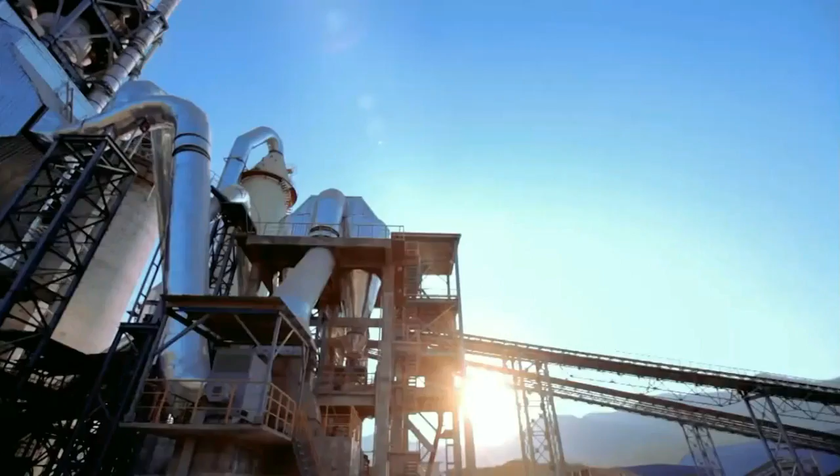The cement industry is perhaps one of the largest and most significant industries today. The industry is capital intensive, with the establishment of a plant requiring a long turnover time. It is also energy intensive, requiring large amounts of fuel for its production process. The process involves the excavation of natural minerals found in the ground.

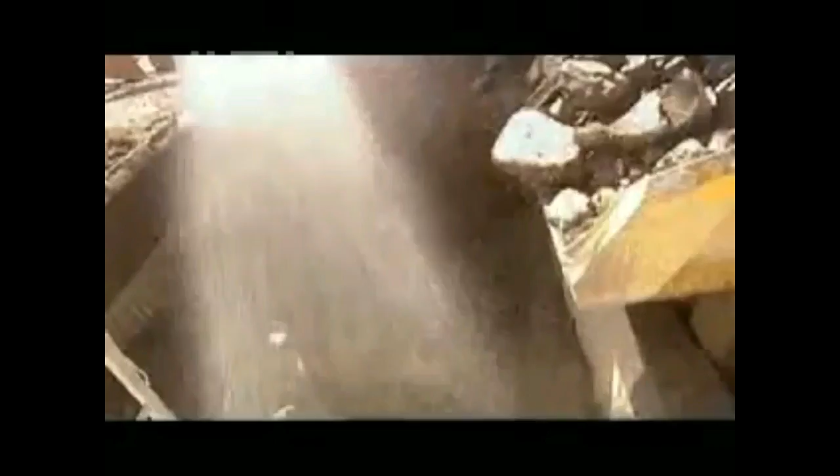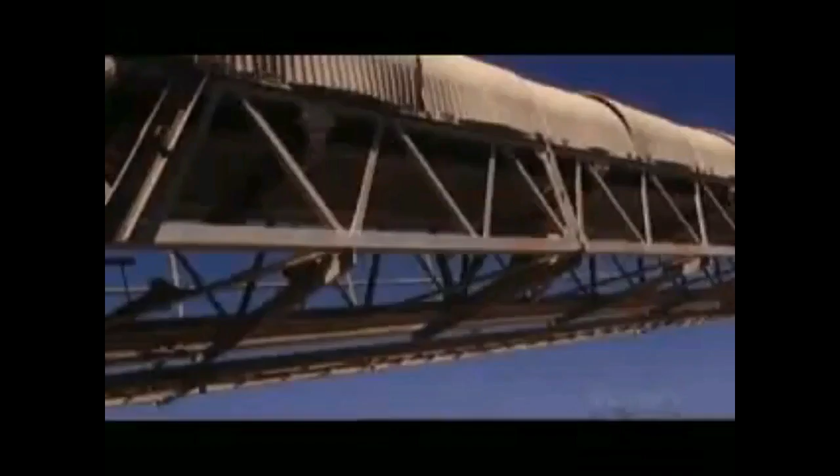Countries are trying to achieve economic growth and sustainability, and with these come a high necessity for infrastructure and highways. Large business companies heavily rely on cement for the establishment of their facilities like malls, stores, and manufacturing plants. As a result, the cement industry experiences a very high demand on its products, being a key to the development of the nation.

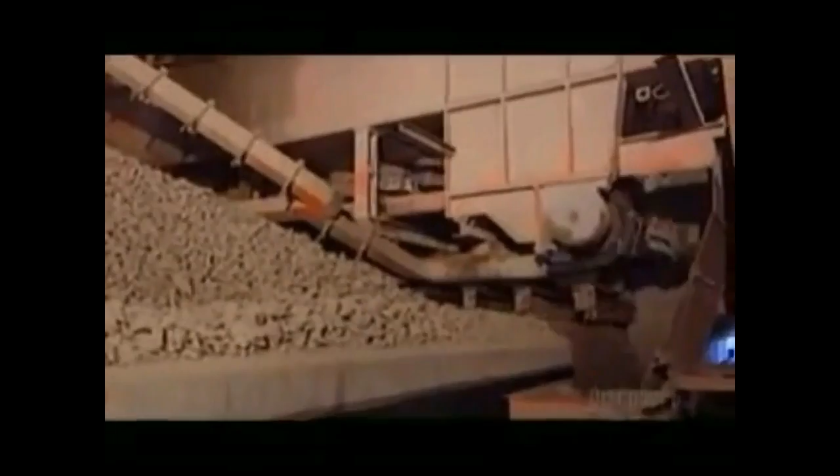The Philippines is considered a developing country, and its economy is considered one of the largest among the Association of Southeast Asian Nations members. The rise of its economy entails the heavy necessity for buildings, infrastructures, and roadwork, since the economy is majorly reliant on tourism and agricultural products in need of transport.

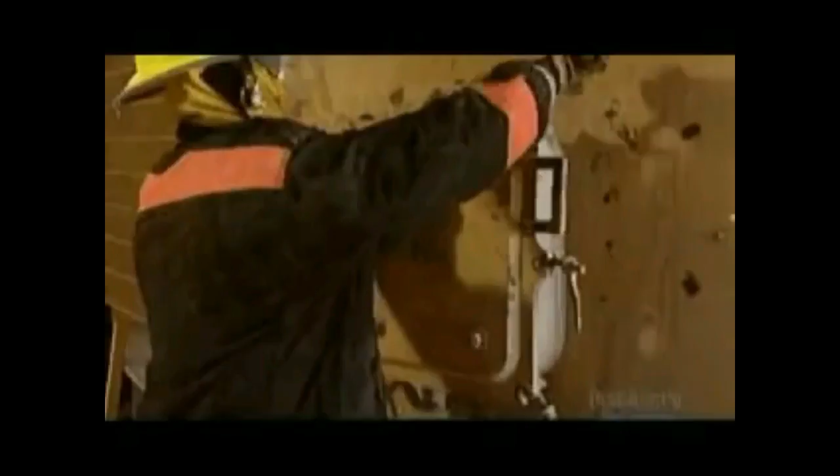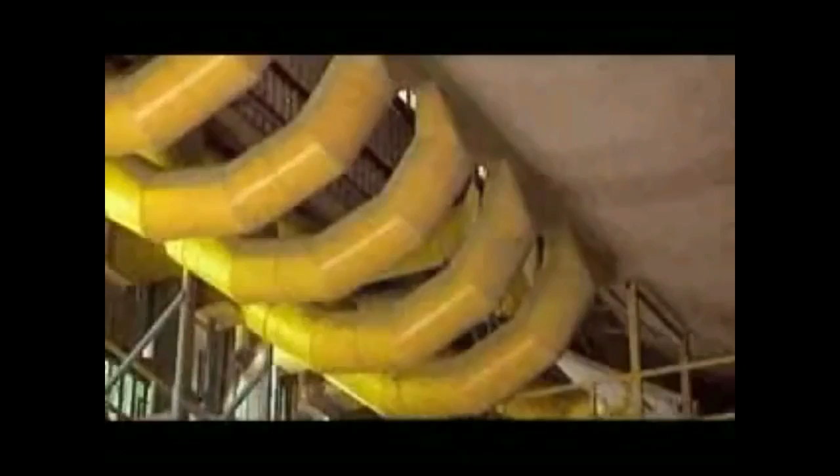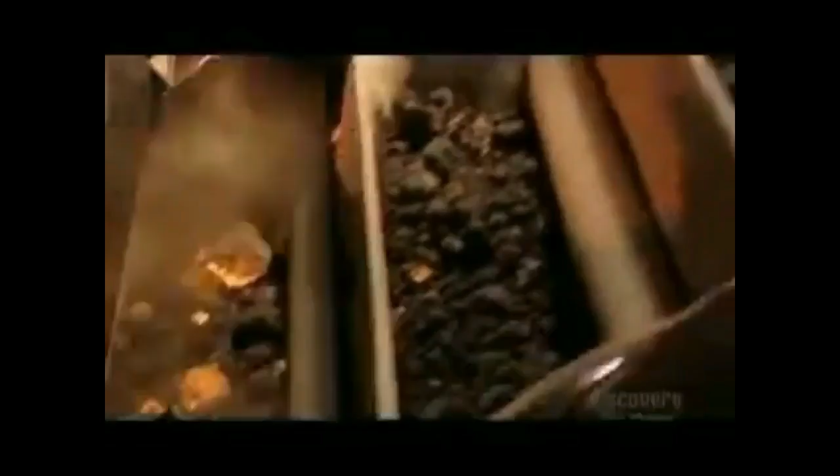Currently, the Cement Manufacturers Association of the Philippines has 6 members. These members have a total of 16 cement plants scattered across Luzon, Visayas, and Mindanao. The Philippines, having a land mass with an abundance of minerals, is ideal to the cement industry. The impending rise of the economy of the Philippines and its transition from an agricultural-based economy to an economy based on manufacturing will pave the way to the success of the cement industry in the years to come.

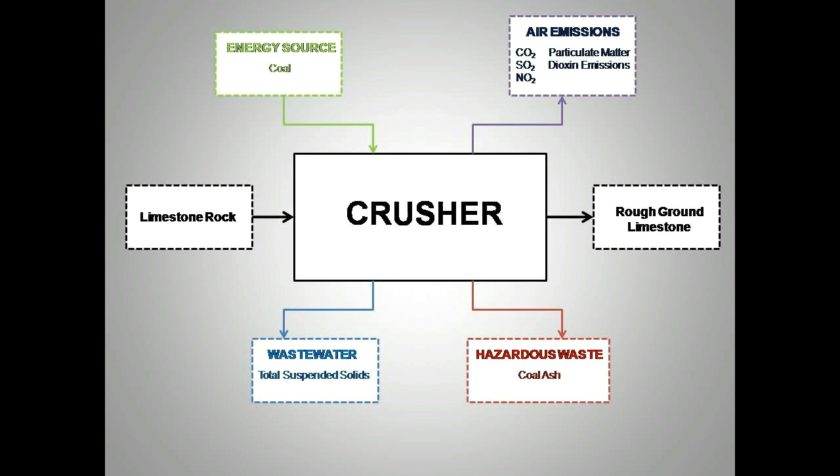In the production of cement, a crusher is first used. A crusher is a machine designed to reduce boulders into smaller rocks, gravel, or rock dust. Crushers may be used to reduce the size or change the form.

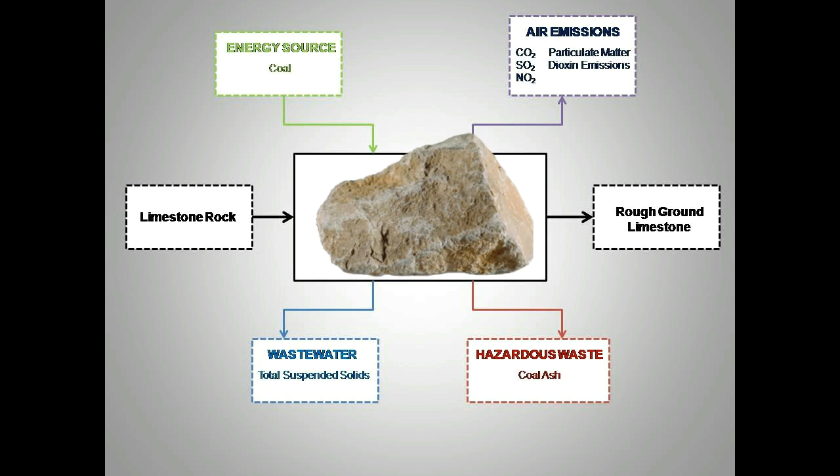For cement production, the limestone rocks that came from the limestone quarry will undergo the crusher machine so that the rocks will be crushed and reduced into smaller ones. The resulting rocks from the primary crusher are still rough ground limestone.

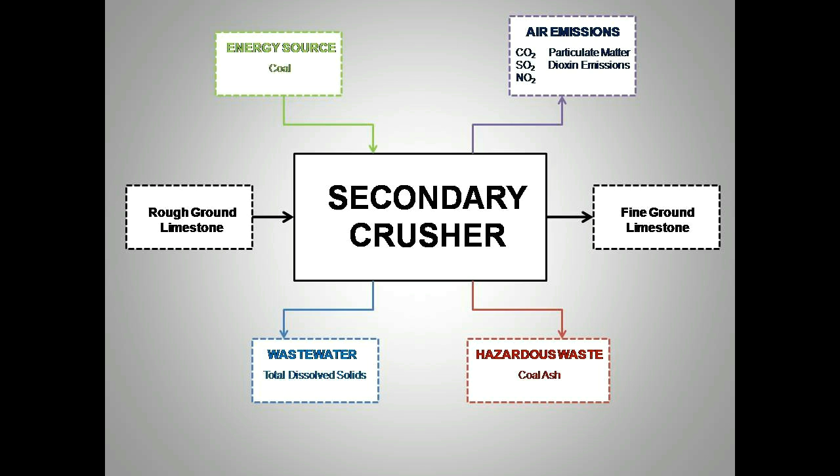To ensure the production of a fine ground limestone, the resulting ground stones from the primary crusher are then passed through a secondary crusher. The third process will be under the proportioning equipment.

In the proportioning process, other raw materials will be added to the materials being used so that the exiting product will contain the desired amount of each material, given the property that they can contribute to the overall product. In the cement production, the fine ground limestone that entered the proportioning equipment is mixed with fly ash, iron silica, slag, and calcium compounds that were delivered by truck. The resulting exiting product is a mixture of sand, limestone, and clay.

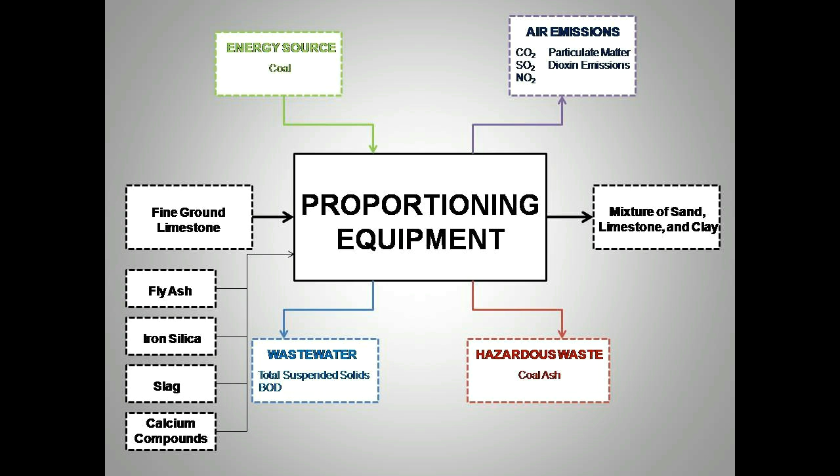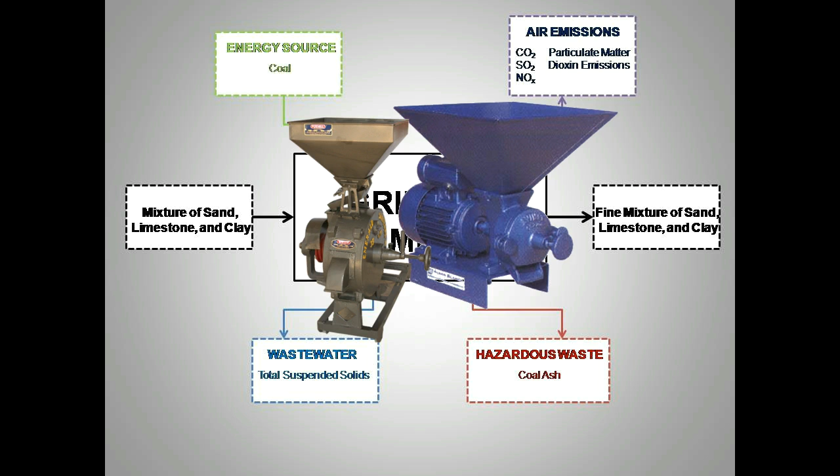The mixture of sand, limestone, and clay that exited from the proportioning equipment will now enter a grinding mill. A grinding mill is a machine that breaks solid materials into smaller pieces by grinding, crushing, or cutting. It is used because the materials added to the fine ground limestone may still be in chunks, which are not desirable. Given the physical nature of the desired cement, the sand, limestone, and clay mixture will go through a grinding mill so that they will obtain a fine powdery-like texture.

After going through the grinding mill, the raw meal will then undergo the preheating tower and the kiln. A kiln is a thermally insulated chamber, a type of oven, which produces temperatures sufficient to complete the cement making. In the production, the blend raw material enters the kiln via the preheating tower.

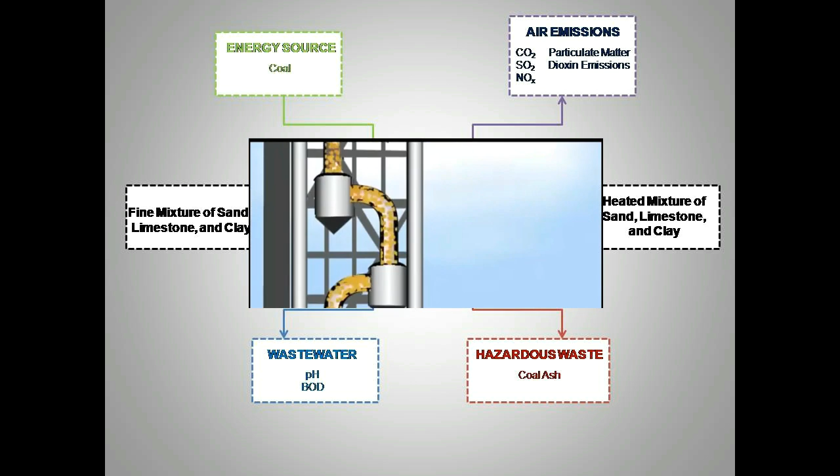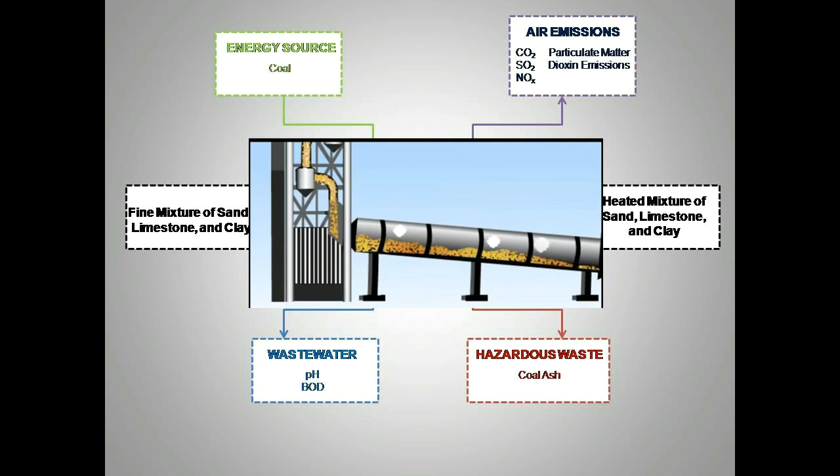In the preheating tower, hot gases are used to heat the raw meal. As a result, the raw meal is already hot before it enters the kiln. The preheating tower provides a series of cyclones in which fast-moving hot gases keep the meal powder suspended in air. All the time, the meal gets hotter and the gas gets cooler until the meal is at almost the same temperature as the gas.

In general, the hot gas from the kiln are blown through the cyclones. Heat is transferred efficiently from the hot gases to the raw material, and this minimizes the waste of fuel when the meal already undergoes the kiln itself.

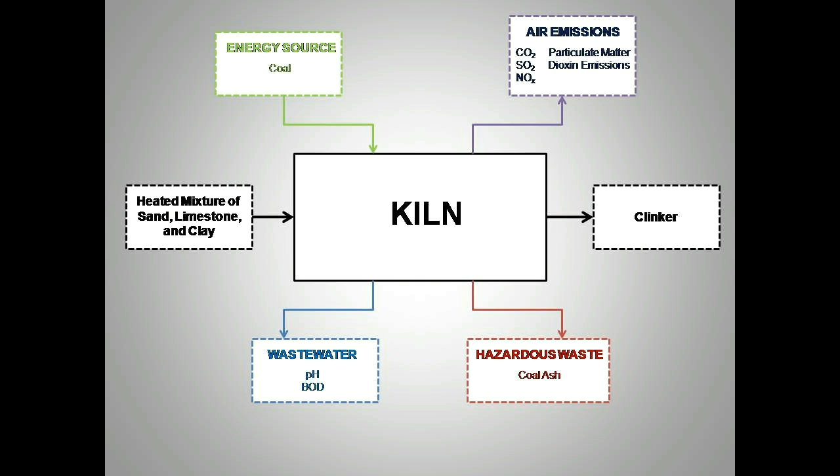The exiting meal from the kiln is now called a clinker, which is the basic material needed to make cement. The clinker will then pass through the clinker cooler to have the clinker cooled. Along the process of cooling, the heat energy from the clinker can be recycled and used again for the heating process. Therefore, this would avoid wasting the heat energy contained.

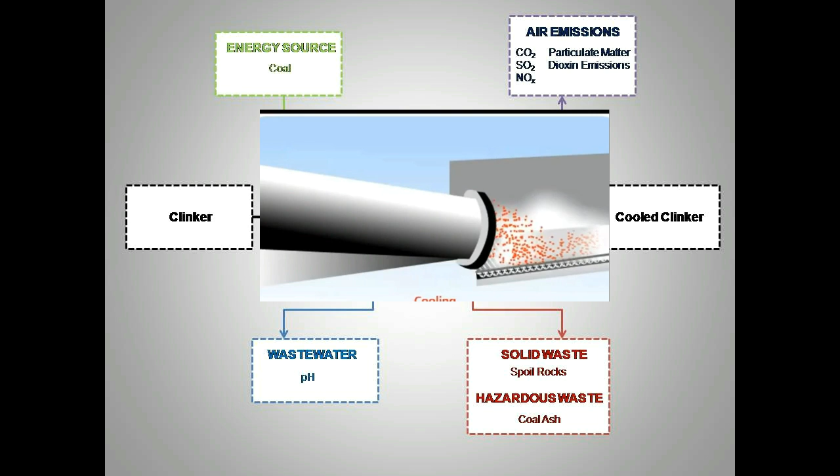This will now make the clinker cool enough to handle and ready for the upcoming grinding, given that the suitable temperature for grinding should only be less than 100 degrees Celsius.

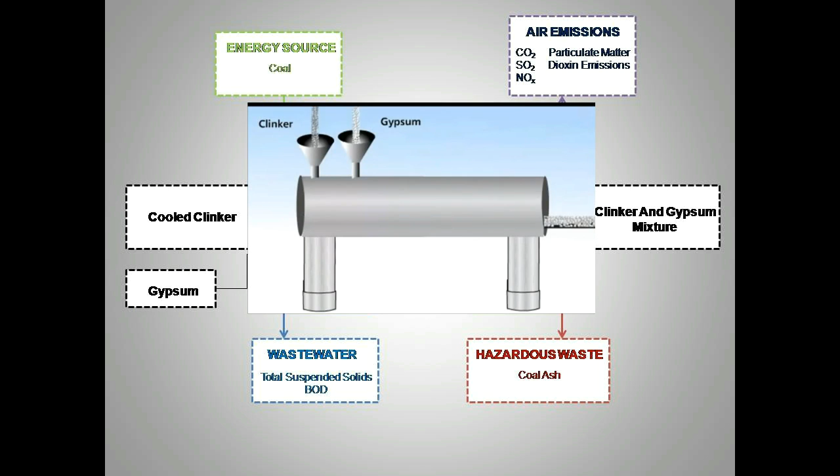The cooled clinker will now enter another proportioning equipment. A new material, which is gypsum, will be introduced. Gypsum plays a very important role in controlling the rate of hardening of the cement. It controls the setting of cement. If not added, the cement will set immediately upon mixing it with water, leaving no time for concrete placing.

The new mixture will undergo another grinding mill. Given that gypsum is added, some parts of it may still be of bigger pieces. They will undergo a grinding mill to break the chunk of materials into smaller and finer pieces.

After being heated, cooled, proportioned, and ground again, the exiting product from the grinding mill will now be the cement, which is now ready for storage and packaging. The cement will be stored in a place where they will be staying until they are ready for packaging.

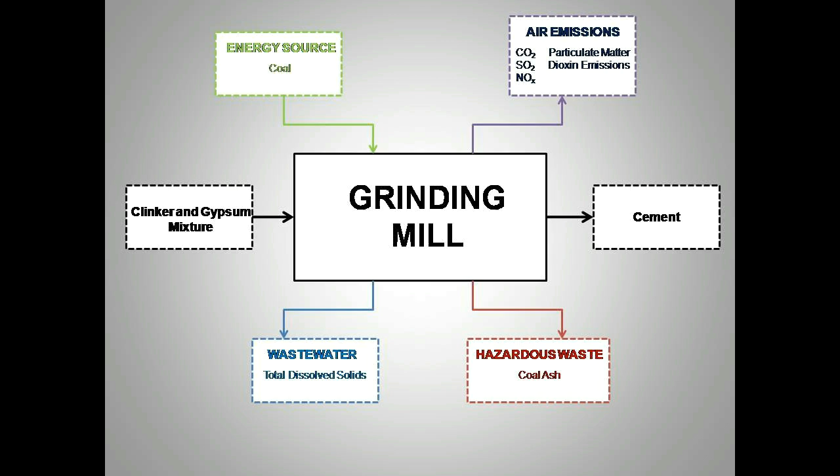Packaging only involves two processes. The first one is the filling process. Here, cement bags made of paper will simply be filled with the cement product. After the filling stage, the still open bags of cement will undergo an airtight sealing process. Here, the bags will be sealed airtight so as not to allow any air to escape or pass through, and of course to prevent any spillage of cement.

After packaging, the final cement products is now ready for distribution, selling, delivery, and use.

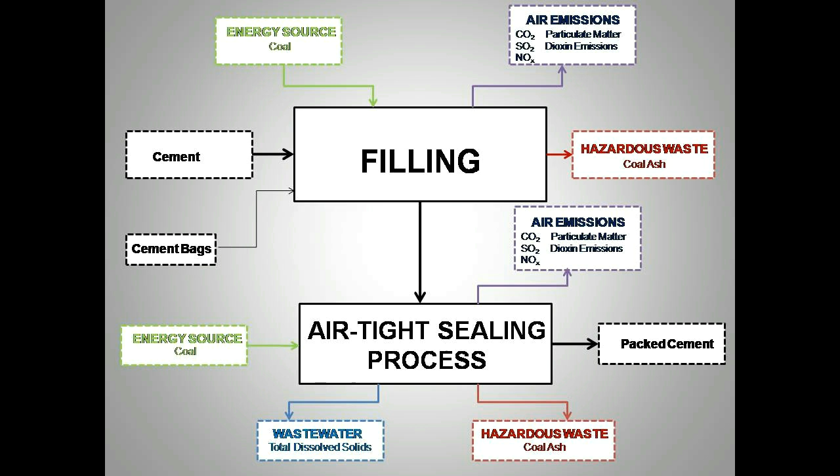Now let's go to the waste characterization. Generally, in the manufacture of cement, the wastewater quality parameters affected are the total dissolved solids, total suspended solids, pH, BOD or biological oxygen demand, and turbidity. These problems arise due to the particles coming from the unit operation which accidentally combine with the water used to cool the equipment.

For the solid waste, there are three main wastes produced, which are coal ash, plastic containers, and sludge. Coal ash is considered as a hazardous waste because it contains toxic heavy metals such as arsenic and selenium. Sludge and plastic containers are considered as a solid waste. The water wastes are treated in the water treatment plant, while the solid and hazardous wastes are sent to the materials recovery facility.

The wastewater treatment plant is where the wastewater from the previous stages of cement production goes in order for it to be treated before discharge. The processes in the production affected the quality of water, which includes the parameters BOD, TSS, TDS, pH, and turbidity.

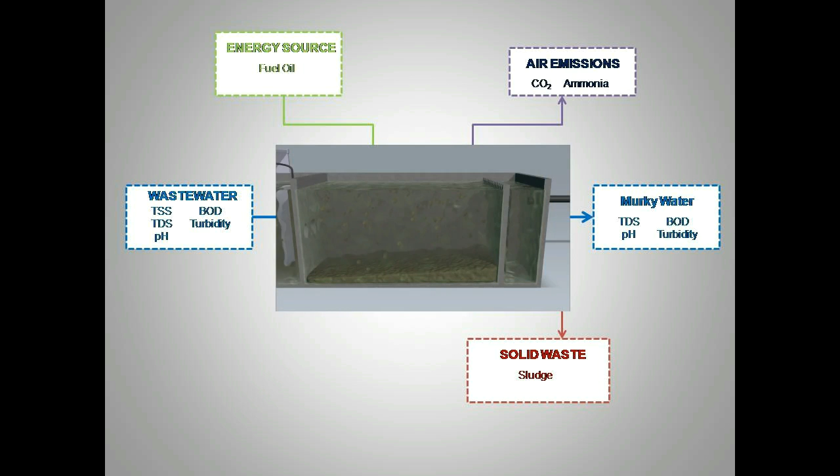For the first part of the treatment plant, the wastewater will undergo sedimentation process. This is a physical water treatment which uses gravity to remove suspended solids from water. The wastewater from the cement production is brought to a settling basin, which is a concrete structure, where the sedimentation process is used to remove the unwanted matter. Here, sludge is removed and collected to be delivered to the MRF.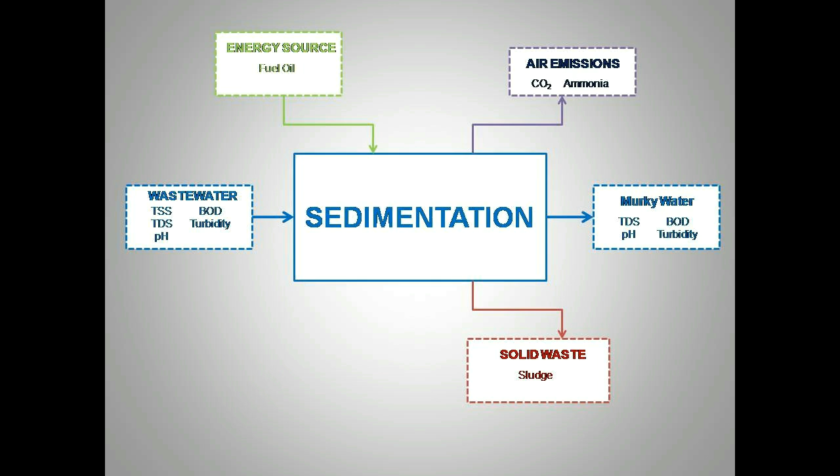The murky water will enter a second water treatment process, which is the multimedia filtration. A multimedia filtration refers to a pressure filter vessel which utilizes 3 or more different media. Here, the largest contaminants brought by the murky water are encouraged to become trapped in the first layer of the filter, with smaller particulates sifting further down into the lower layers.

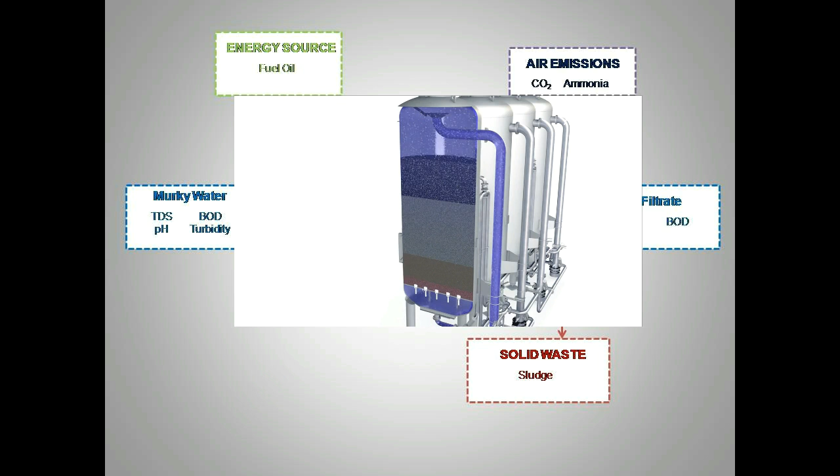Trapping contaminants in this manner allows for more efficient turbidity removal. Sludge is removed in the filtration process along with the wastewater parameters TDS and turbidity.

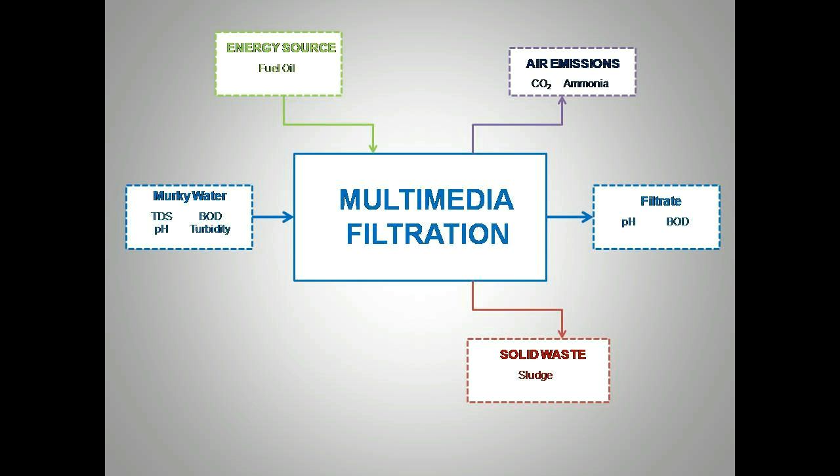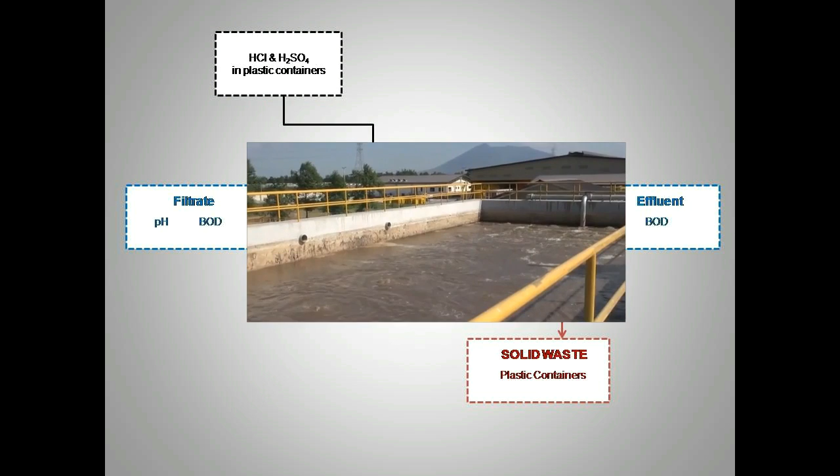The filtrate from the multimedia filtration will enter an equalization tank. The main function of an equalization tank is to act as a buffer. It collects the incoming raw effluent that comes at widely fluctuating rates, stores it, and lets it out during a non-peak time, when there is little or no incoming raw effluent.

When the filtrate from the filtration enters the equalization tank, hydrochloric acid and sulfuric acid are added to neutralize the pH of the water. Therefore, in here, the flow rate of the entering and exiting water is equalized along with the neutralization of the pH. The effluent from the equalization tank now only contains BOD as a wastewater parameter affected.

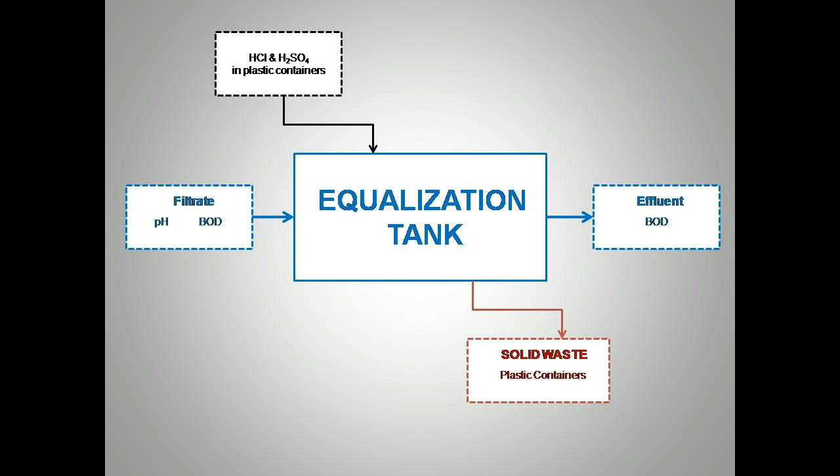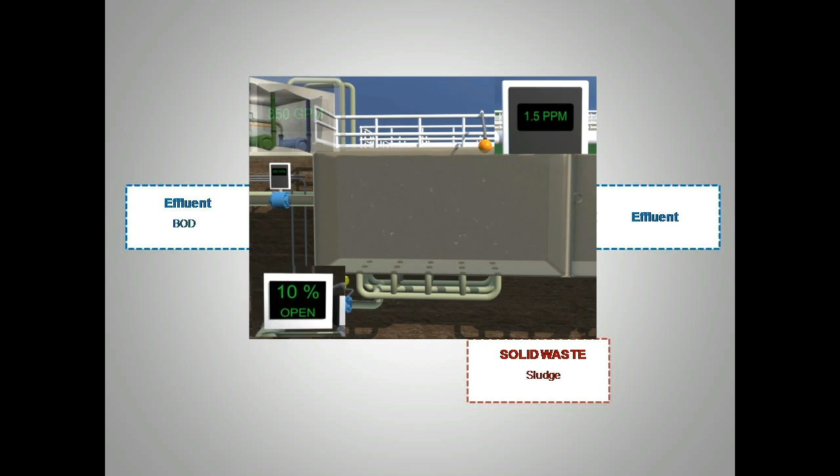It will undergo the aeration process. Aeration is used to mix, circulate, or dissolve air into a liquid, in this case, water. In the treatment, air is added into the effluent, which allows aerobic biodegradation of the pollutant component. It provides oxygen to the bacteria for treating and stabilizing the wastewater effluent.

This is because without the presence of sufficient oxygen, bacteria will not be able to biodegrade the incoming organic matter in a reasonable time.

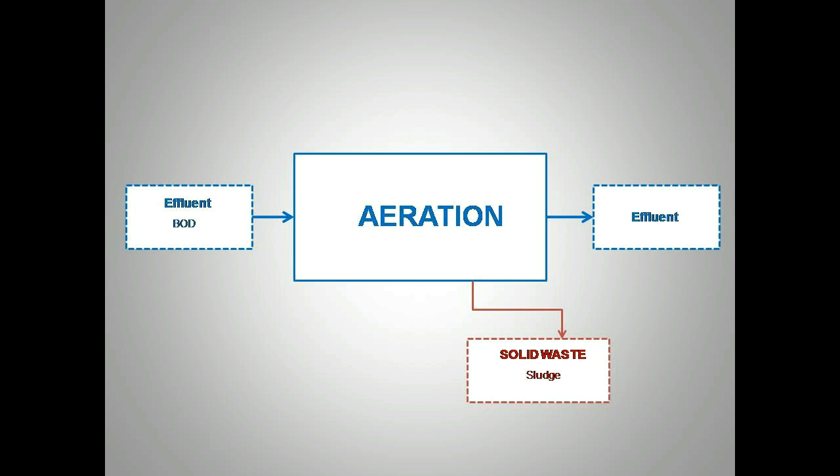After the aeration, the resulting effluent will undergo the disinfection process, which is the final stage in the water treatment. This process provides a degree of protection from contact with pathogenic organisms as it removes, deactivates, and kills those organisms. In this process, a disinfectant is used to aid in the purification of the effluent water.

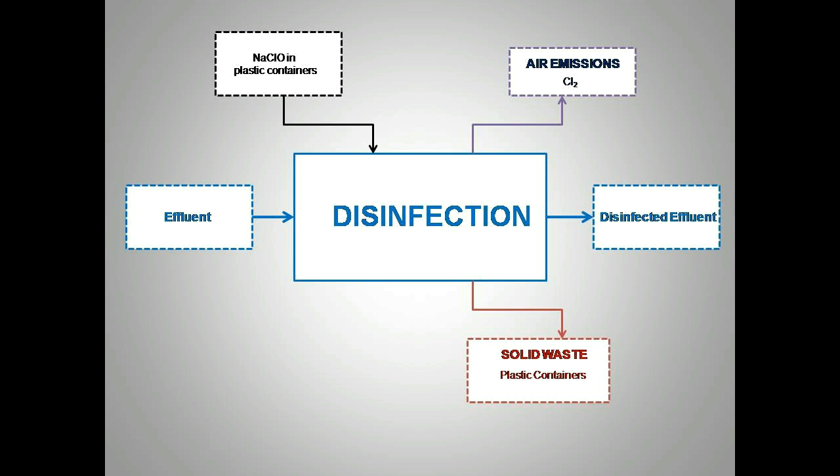Sodium hypochlorite is added as it is very effective for water purification. The effluent coming from the disinfection process now complies with RA 9275 and is ready for discharge.

The materials recovery facility involves three operations: sorting, grinding, and briquetting or drying. The solid and hazardous waste such as coal ash, plastic containers, and sludge generated by the different operations of the cement plant will enter the MRF to undergo separation.

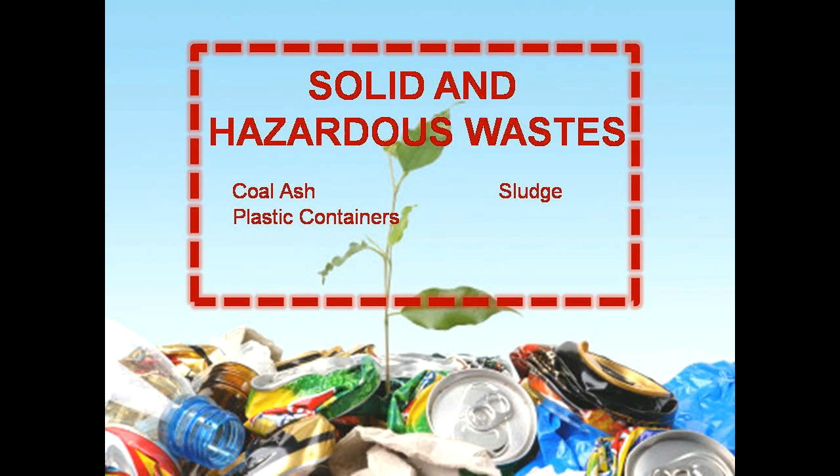The solid and hazardous waste will undergo a sorting process wherein the plastic containers of hydrochloric acid, sulfuric acid, and sodium hypochlorite used in the equalization and disinfection process are separated from the other solid waste and hazardous waste.

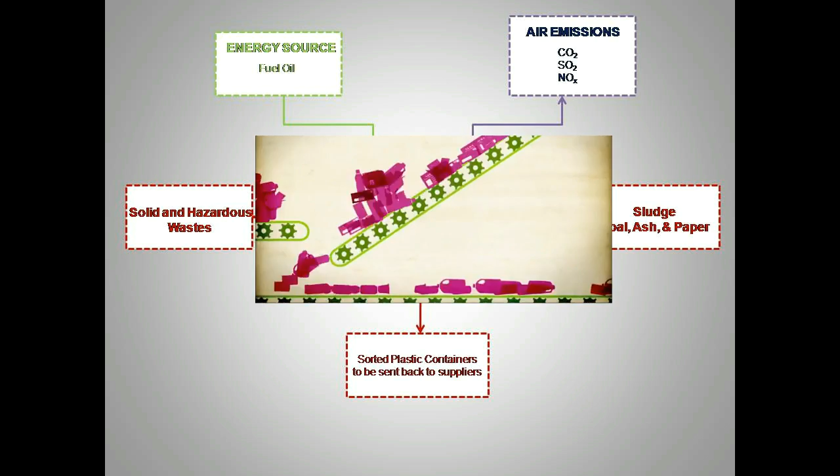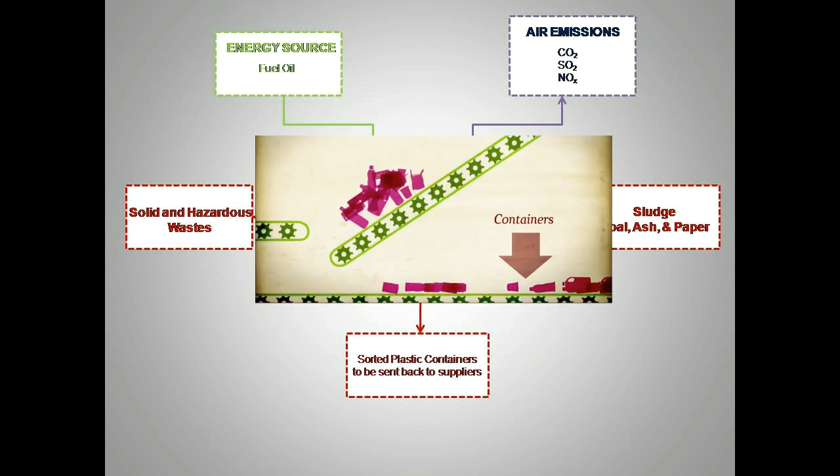This is done by virtue of gravity, where the waste entering the MRF are placed in a moving conveyor belt with gaps along the track. The sludge, coal ash, and paper waste fall into a container, while the less heavy but larger waste, particularly the containers, proceed to the end of the conveyor belt.

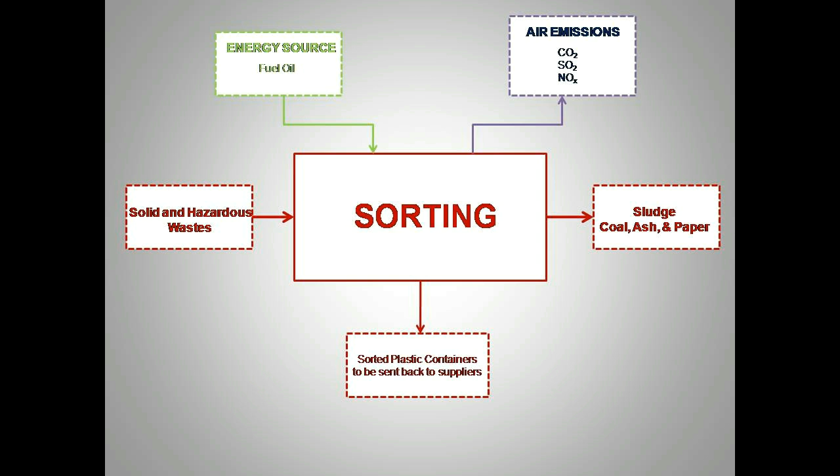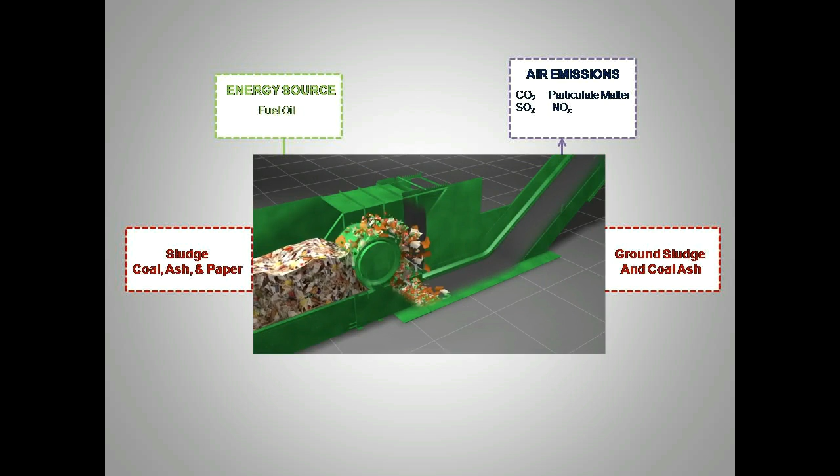The sludge, coal ash, and paper coming from the sorting equipment will enter a grinder with a dryer. The wet sludge is heated until dry, to be more suited for the briquetting stage of the MRF. The waste will be reduced into smaller sizes that are suited and necessary for the next operations in the MRF. The output stream of this operation is a mixture of the refined waste that entered the grinder.

The ground sludge, paper, and coal ash will enter a briquetting equipment in order to be compacted and compressed into a smaller block. The resulting product is called a briquette, which is a block of combustible material, in this case coal ash and paper.

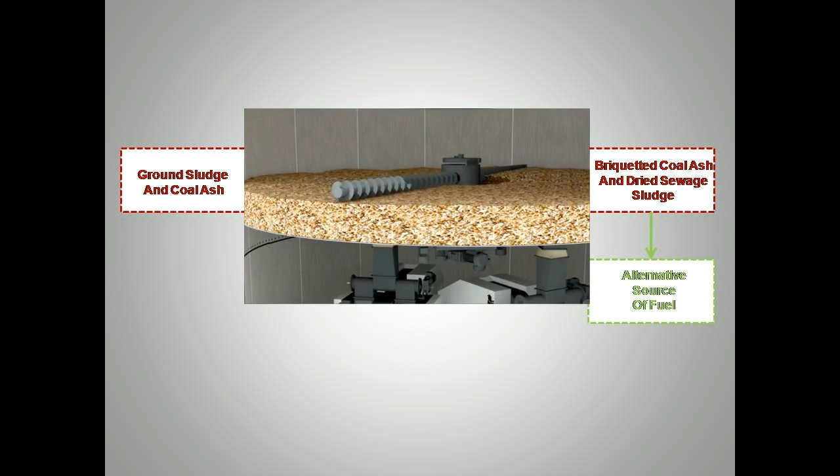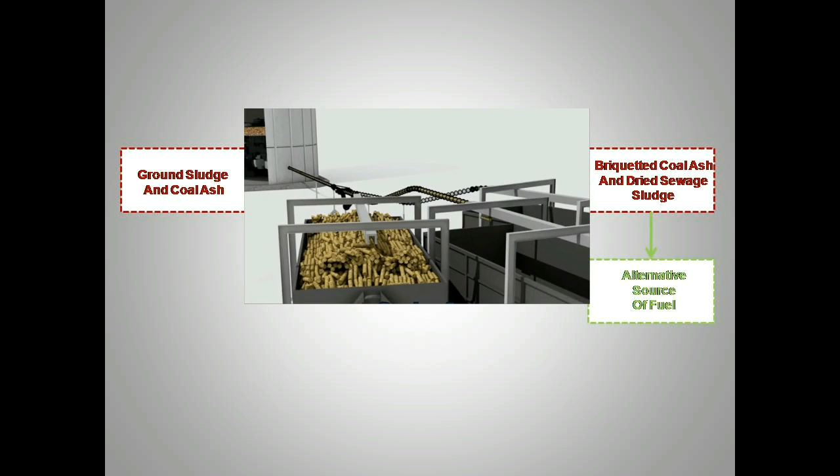These briquettes are then used as an added energy source for the clinker cooler and kiln. By doing this, the solid waste from the MRF is reused for another purpose and will minimize the waste to be disposed of from the plant. The cost for fuel to operate the equipment will also be heavily reduced by using the briquettes produced by the materials recovery facility.